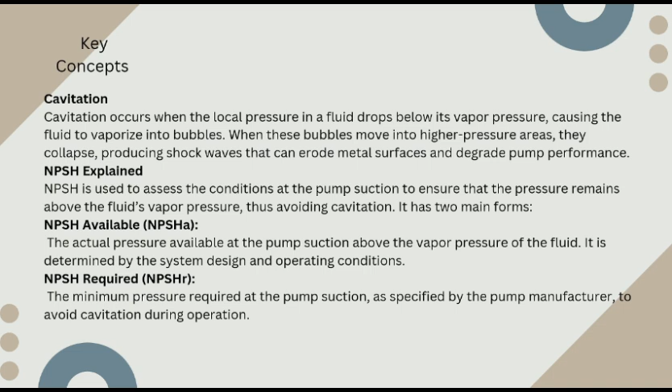NPSH is used to assess the condition at the pump suction to ensure that the pressure remains above the fluid's vapor pressure, thus avoiding cavitation. It has two main forms: NPSH Available (NPSHA), the actual pressure available at the pump suction above the vapor pressure of the fluid, which is determined by the system design and operating conditions; and NPSH Required (NPSHR), the minimum pressure required at the pump suction as specified by the pump manufacturer to avoid cavitation during operation.

So in this section, we will tackle some relevant formulas and examples for the net positive suction head available.

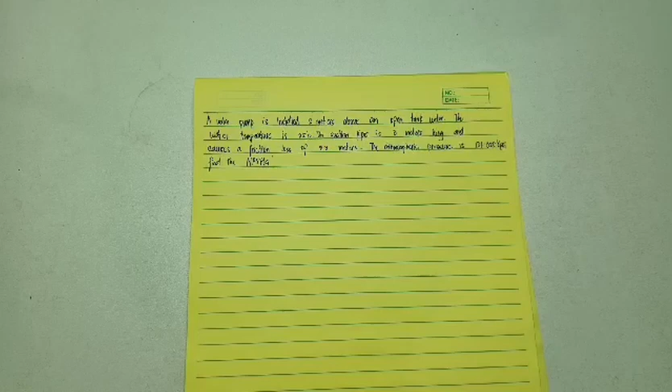The problem states that a water pump is installed 2 meters above an open tank of water. The water temperature is 25 degrees Celsius. The suction pipe is 3 meters long and causes a friction loss of 0.3 meters. The atmospheric pressure is 101.325 kilopascal. Find the NPSHA. First, we will write down our formula for NPSHA.

The formula is: PO minus PV over density times g, plus the height over gc, minus HF. So first we will find the PV.

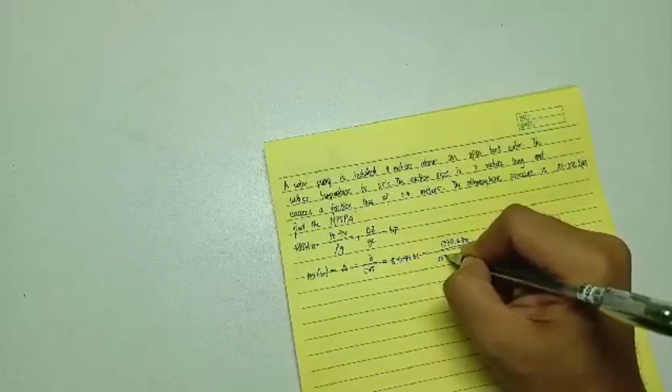The formula for PV is log of x equals A minus B over C plus the temperature, where A, B, and C are constants: 8.07131, minus 1730.630 over 233.426 plus 25 degrees.

That gives us 23.68 millimeter mercury. We need to convert this millimeter mercury into Pascal. To do so, we multiply it by 101,325 Pascal over 760 millimeter mercury, which leads us to 3157.07 Pascal.

Now we are ready to calculate the NPSHA. The NPSHA available is the atmospheric pressure, which is 101,325 Pascal, minus the PV, which is 3157.07.

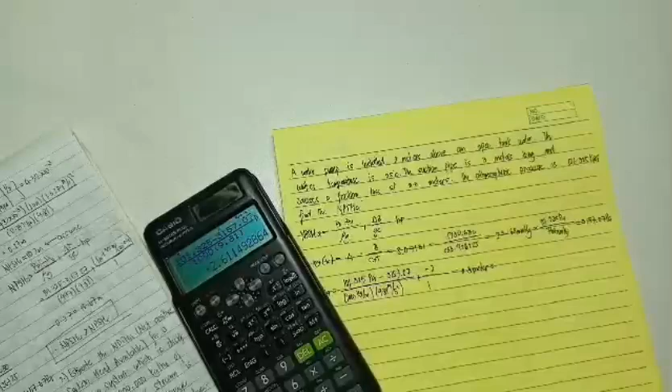Our answer here is negative 2.611 meters.

So assuming that we have an NPSHR of, let's say, 10 meters, is our net positive suction head available greater than the required? No, right? So therefore NPSHA is less than NPSHR. Therefore, cavitation will form in the pump.

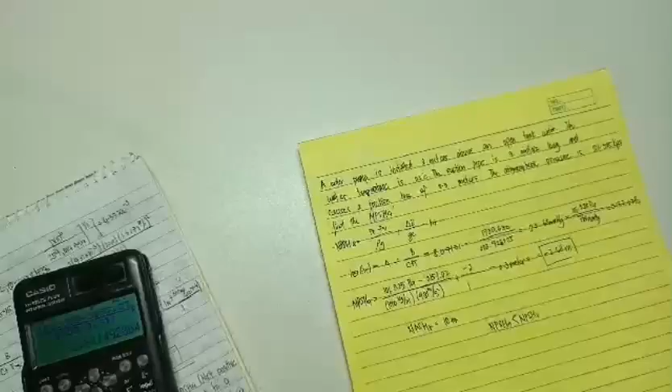So the formula for the net positive suction head available is this, just like in Bernoulli's equation, but without the efficiency and the power of the motor. First, this is PO minus PV over density times g, plus the difference in height over gc, minus HF, or the friction loss.

So why is there a g there? In net positive suction head, we are measuring the head, not the pressure. So we must find the unit to be in meters. Therefore, by putting a g there, we will get a meter unit.

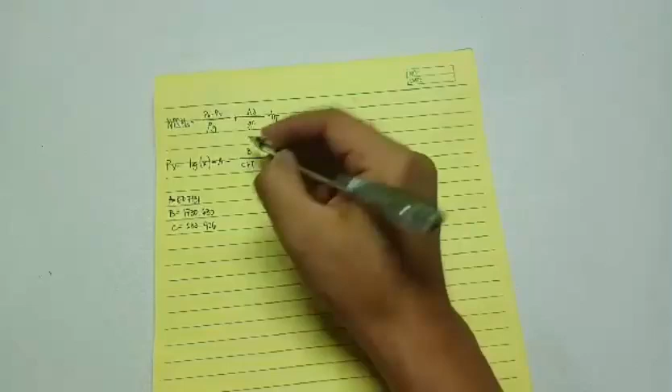So to get the value of the PV, it is simply log of x equals A minus B over C plus T, in Celsius. And A, B, and C are constants, and here are their values: A is 8.07131, B is 1730.630, and C is 233.426.

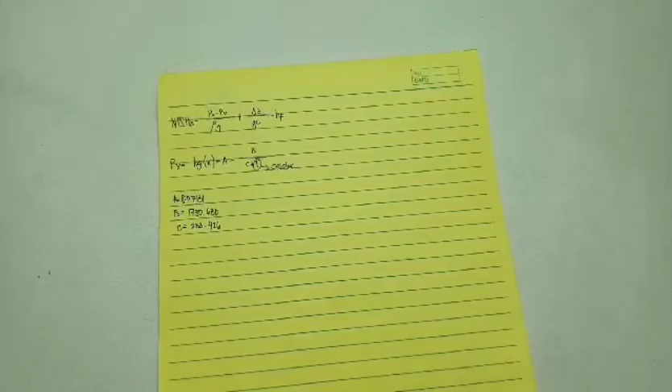So now we have an NPSH problem here. A pumping system is required to deliver 28.3 liters per second of water at 15 degrees Celsius.

The suction line has a diameter of 152 mm and is 91 meters long, made of cast iron. The suction inlet is located 6 meters above the reservoir level. The reservoir is exposed to an atmospheric pressure of 101 kilopascals. The required net positive suction head of the pump is 2 meters.

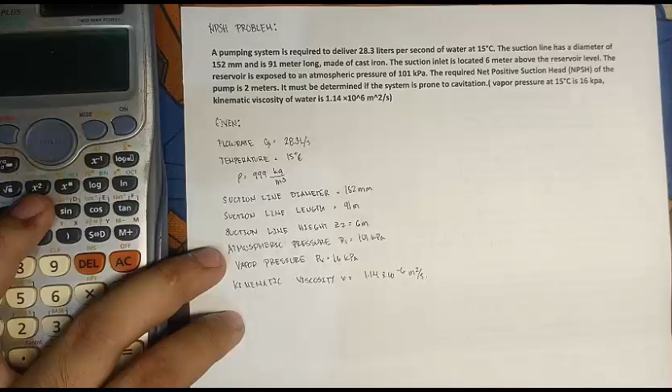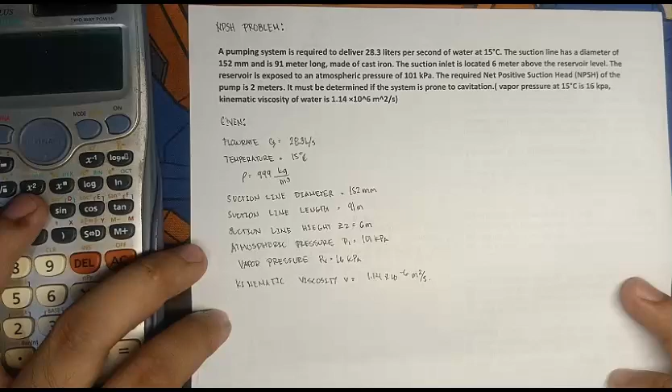It must be determined if the system is prone to cavitation. The vapor pressure at 15 degrees Celsius is 16 kilopascals.

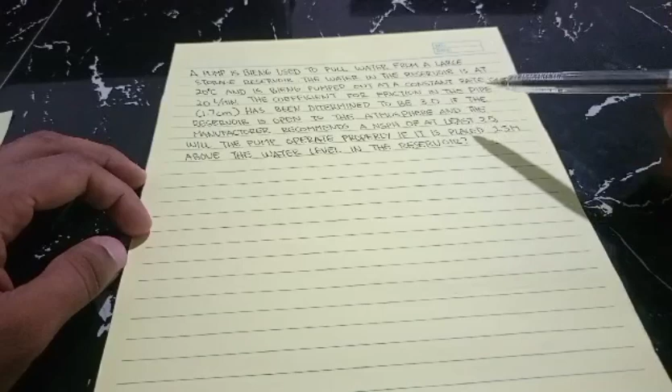The coefficient of friction in the pipe, 1.7 centimeters, has been determined to be 3.0. If the reservoir is open to the atmosphere and the manufacturer recommends an NPSH of at least 2.5, will the pump operate properly if it is placed 1.5 meters above the water level in the reservoir?

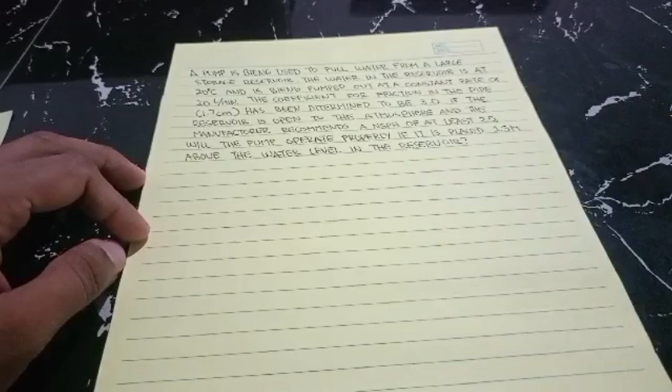So first, in order to understand the problem, you should draw it out first. So this is the reservoir, and we raise it to 1.5 meters.

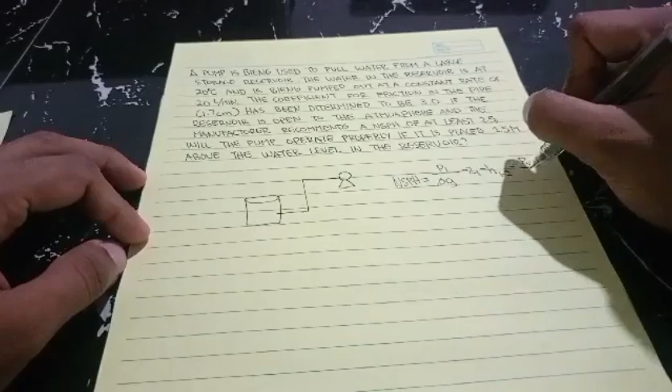Then we write the formula for NPSH, which is equal to P1 over density times gravity, minus Z1, minus H1, minus vapor pressure, divided by density times gravity.

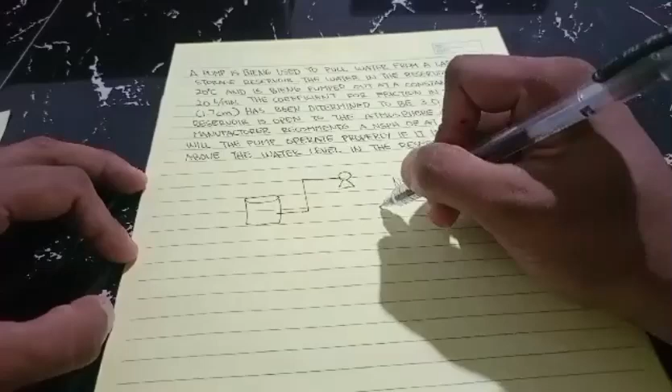So first we get H sub 1 minus 2, and the formula is CF times u squared divided by twice the gravity.

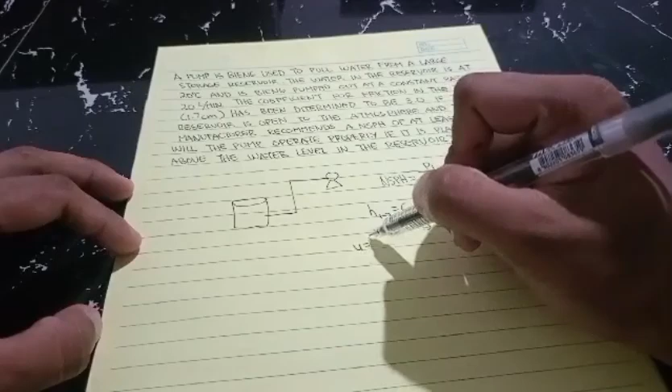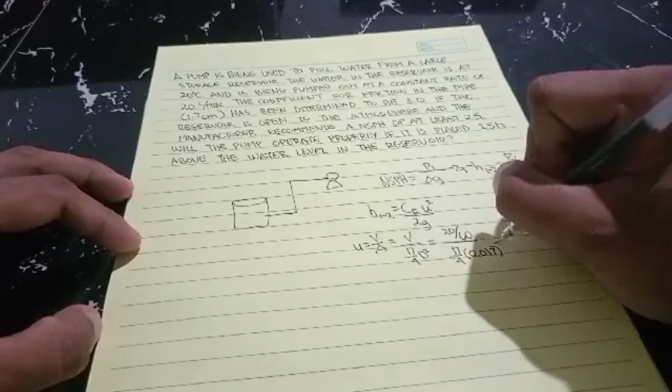So we convert u first into velocity. The formula is u is equal to v divided by pi over 4 times d squared, which is 20 liters per minute divided by pi over 4 times d, converted to meters squared, and it is equal to 1.1 meters per second.

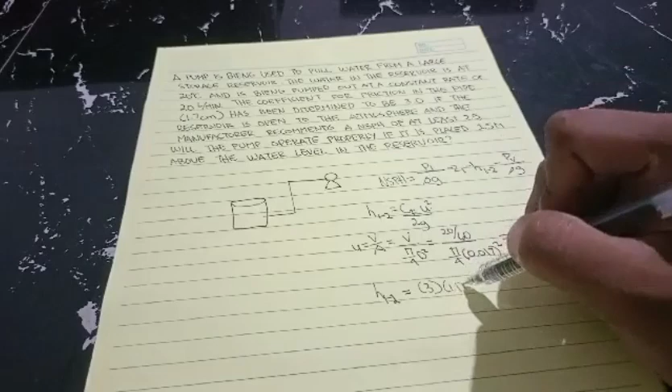Then we go back to the previous formula and substitute the given data. So 3 times 1.1 squared divided by 2 times gravity is equal to 0.185 meters. Then we go back to the formula of NPSH.

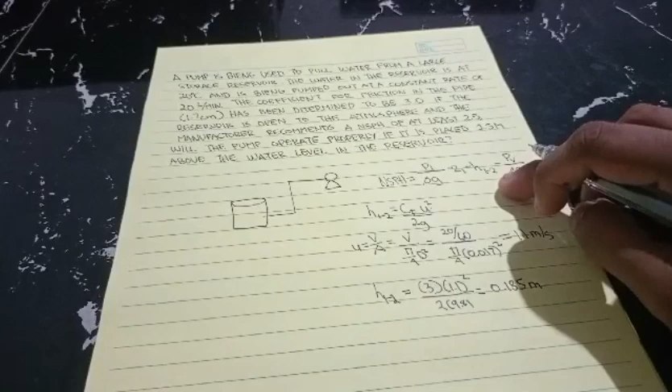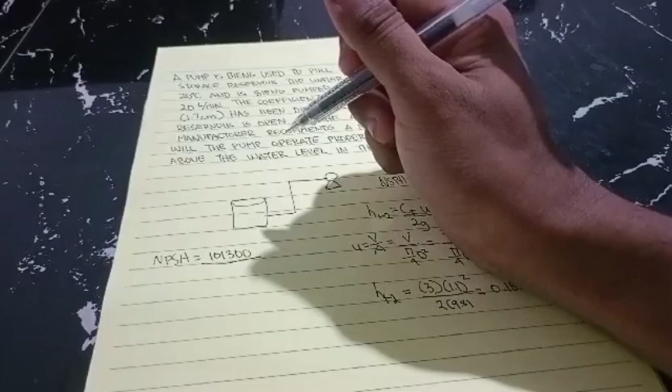And NPSH, then we substitute all the given data. The atmospheric pressure is 101,300 Pascal. The vapor pressure of water at 20 degrees Celsius is 2,985, and the density of water at 20 degrees Celsius is 995.7. So density of 995.7 times gravity minus the head.

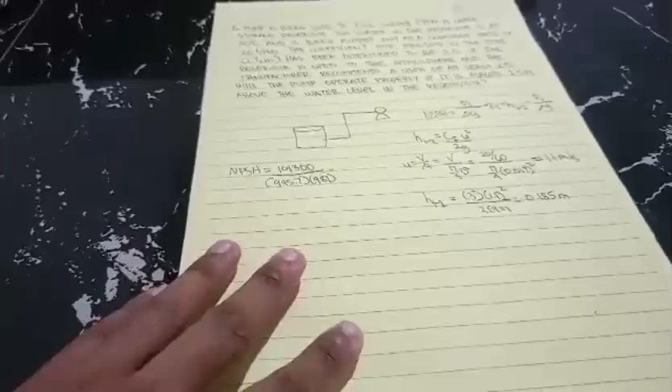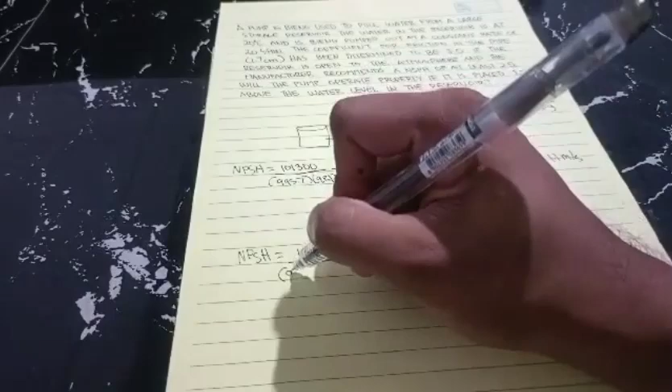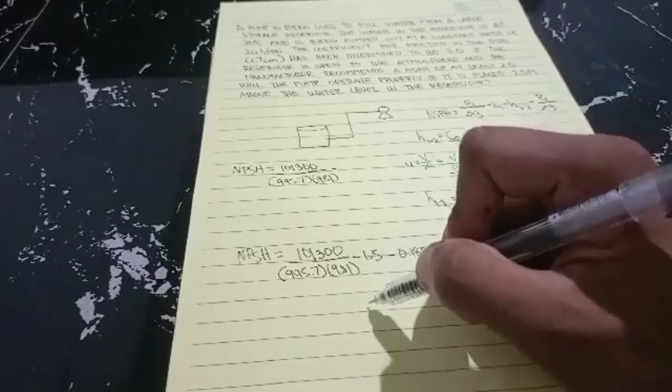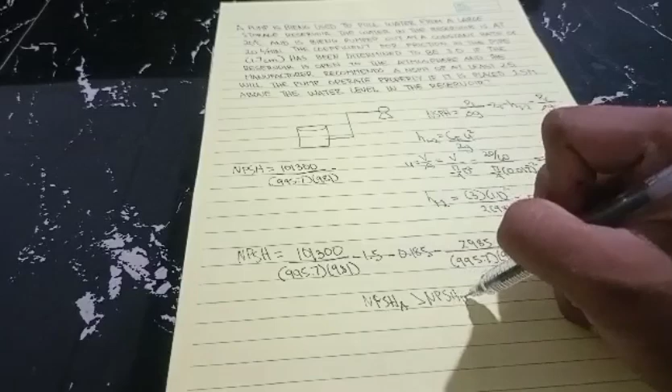NPSH is equal to the atmospheric pressure divided by the water density times gravity, minus Z1, minus the computed H sub 1-2, that is 0.185, minus the vapor pressure of water at 20 degrees which is 2,985, divided by the density of water at 20 degrees times gravity. So it is equal to 8.38 meters. Comparing the NPSH available is greater than NPSH required, so the pump will operate properly even if we place it at 1.5 meters above the water level in the reservoir.

Next problem: a horizontal shaft centrifugal pump lifts water at 65 degrees Celsius. The suction nozzle is 1 meter below the pump center line. The pressure at the suction point equals 200 kilopascal gauge. The velocity is 3 meters per second. At 65 degrees Celsius, the saturation pressure is 25 kilopascal. The specific volume of saturated liquid is 0.001020 cubic meter per kilogram. Calculate the net positive suction head.

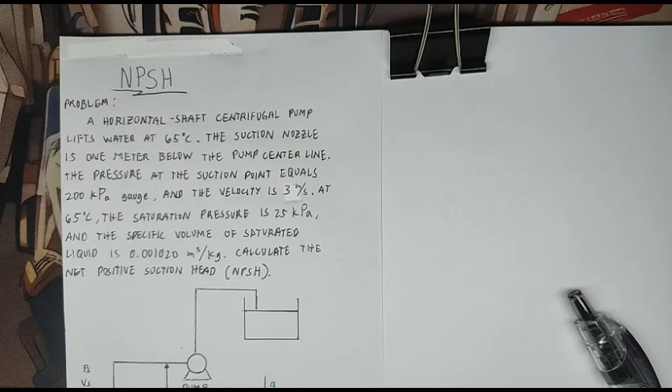So the given is: PS, the pressure at suction point, is 200 kilopascal. The velocity at suction, Vs, equals 3 meters per second. The suction nozzle below the pump center line, ZA, equals Z1 minus ZS, equals 1 meter. The saturation pressure at 65 degrees Celsius, PSAT, equals 25 kilopascal. The specific volume of liquid at 65 degrees Celsius, V, equals...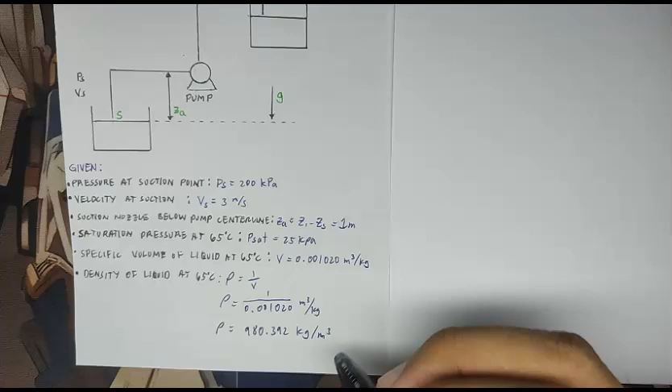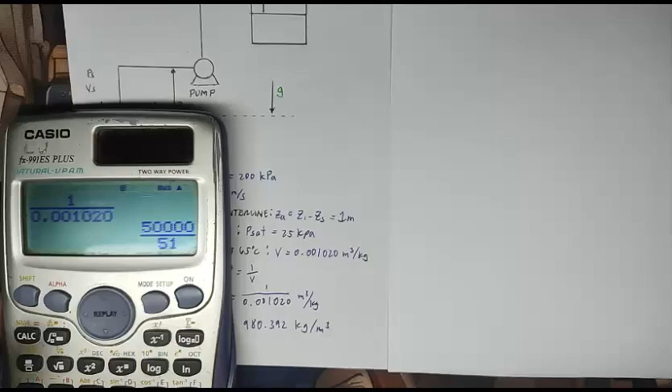1 over 0.001020. So they are the same.

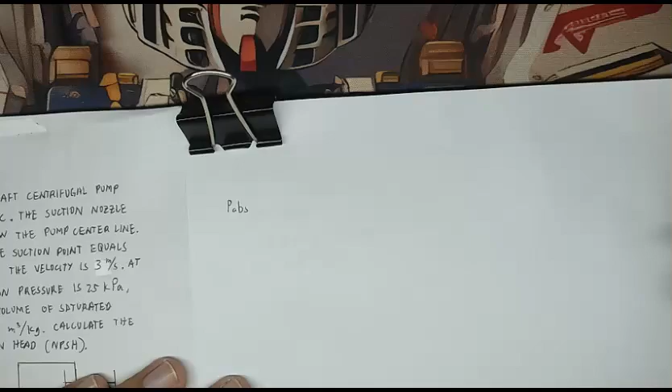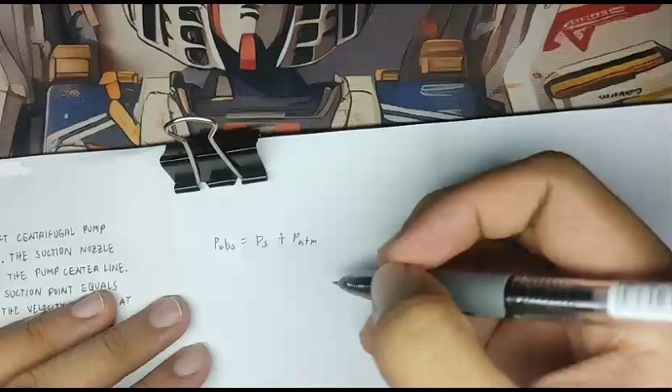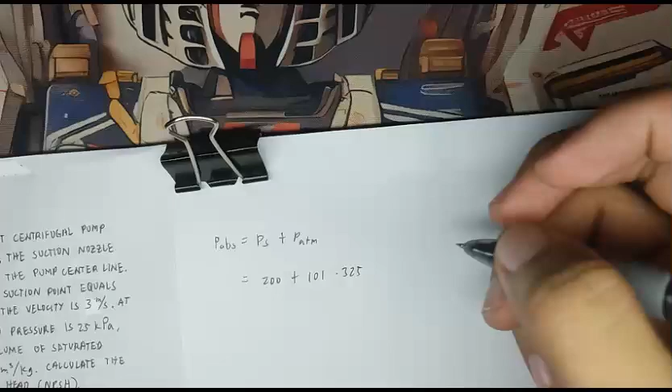P absolute is equal to PS plus PATM. Given, PS is 200 kilopascal. PATM, at 1 ATM, we have 101.325 kilopascal. Substituting into the formula: PS is 200 plus 101.325 kilopascal. So our P absolute is equal to 301.325 kilopascal.

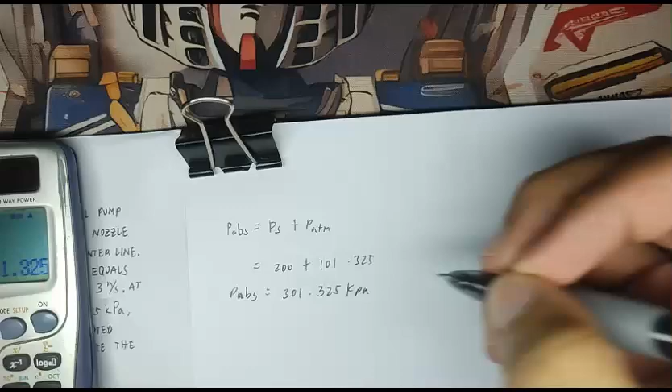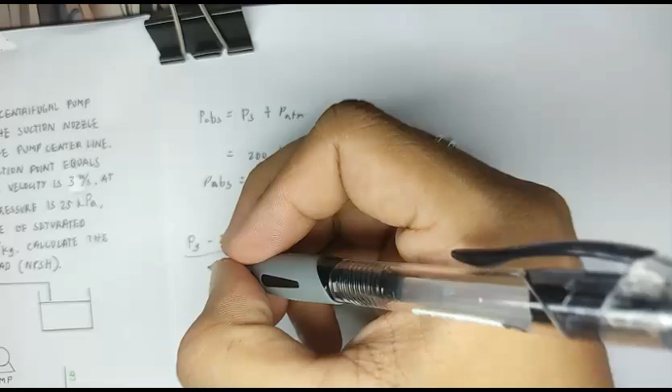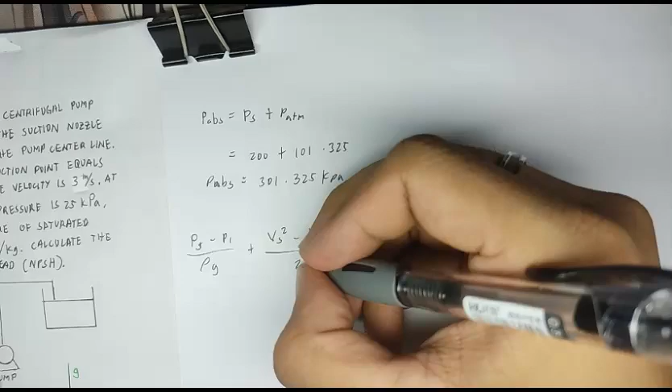Recall the Bernoulli equation. Its formula is P1... PS minus P1 over density times G, plus Vs squared minus V1 squared over 2G, minus ZA. So our net positive suction head formula is...

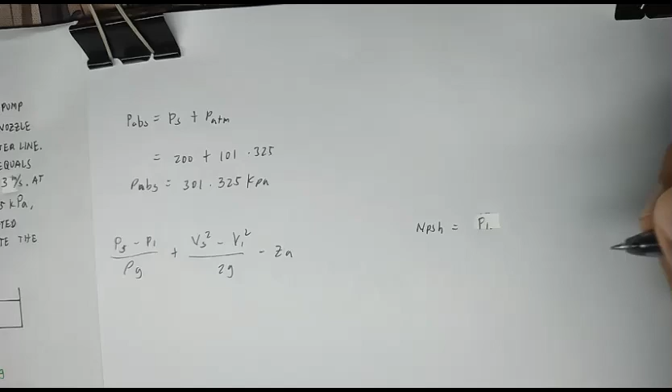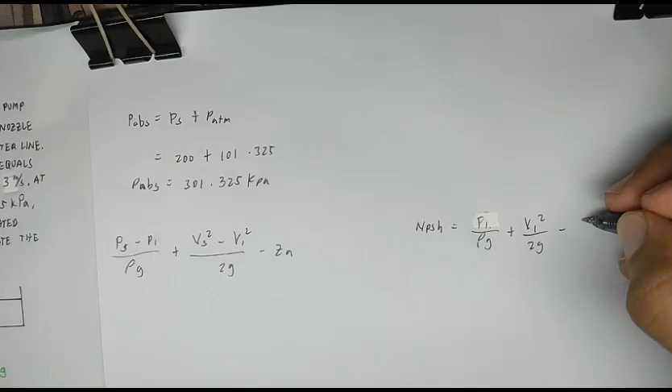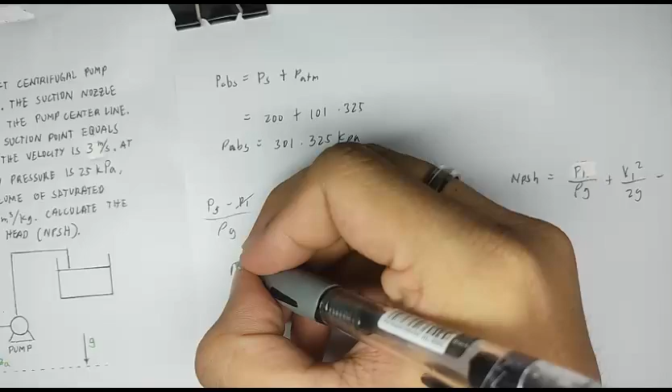NPSH is P1 over density G plus V1 squared over 2G minus P saturation over density G. But we don't have given P1 and V1 squared. So our formula becomes PS over density G plus Vs squared over 2G minus ZA, since this formula has no P1 and V1.

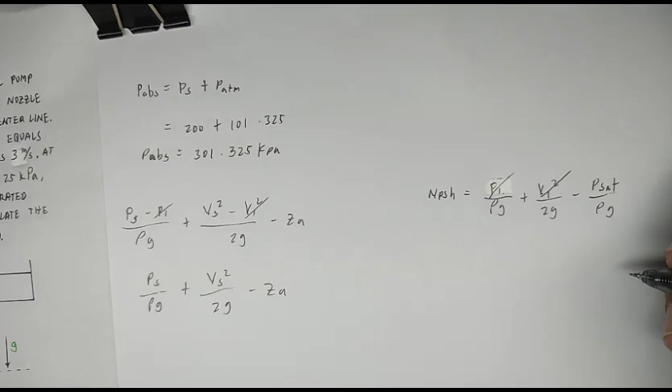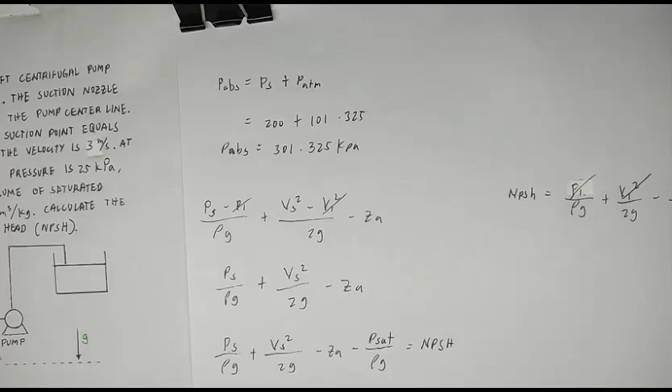So we can substitute PS and Vs squared into our NPSH formula: PS over density G plus Vs squared over 2G minus ZA minus P saturation over density G equals NPSH. We can combine PS and PSAT: PS minus P saturation over density G plus Vs squared over 2G minus ZA equals NPSH. This is our working formula.

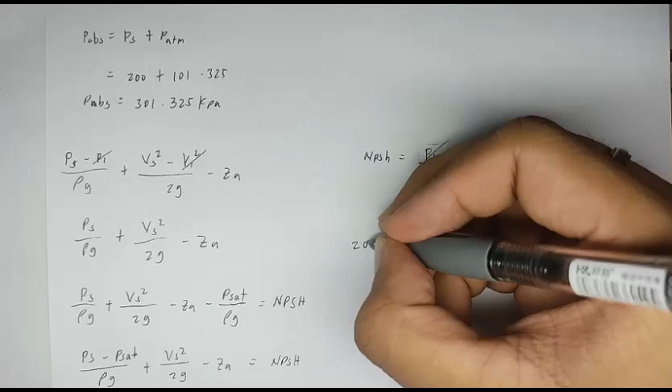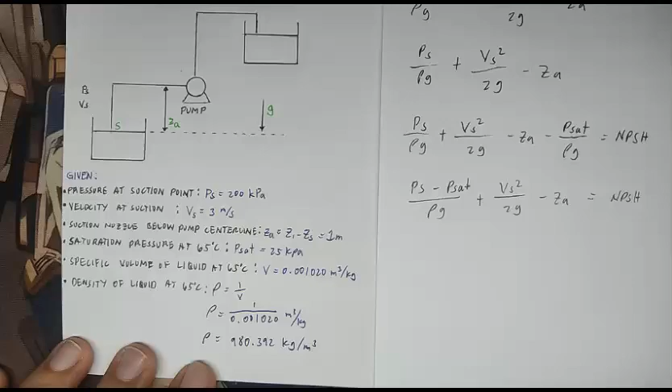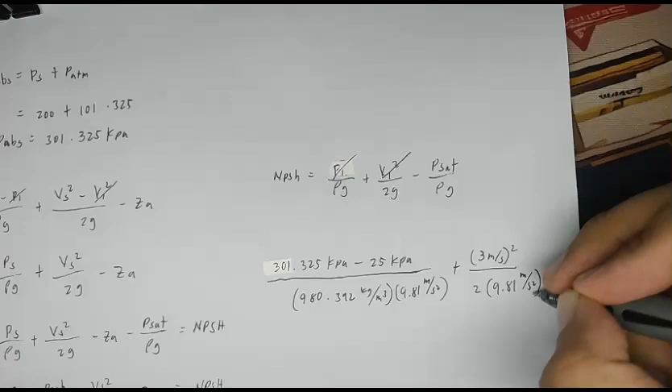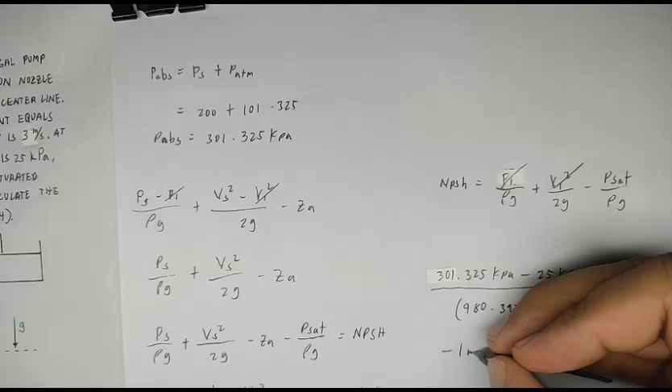Our P absolute is 301.325 kPa, minus P saturation, which is 25 kPa, over density. Our density is 980.392 kg per cubic meter, times gravity 9.81 meters per second squared, plus Vs squared. Our Vs is 3 meters per second, so 3 meters per second squared, over 2G, 2 times gravity 9.81 meters per second squared, minus ZA. Our ZA is 1 meter.

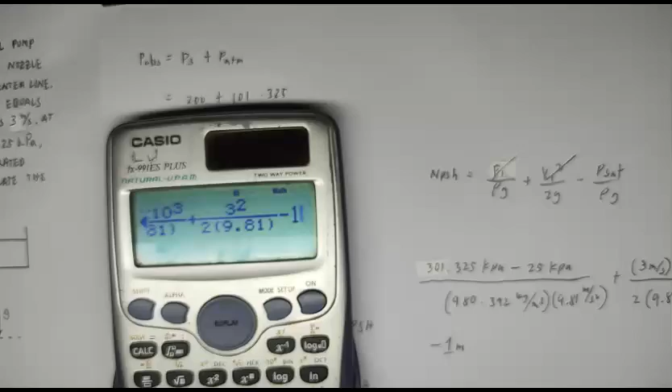301.325 minus 25 times 10 to the power of 3, over 980.392 times gravity 9.81, plus 3 squared over 2 times gravity 9.81, minus 1 which is our ZA. Our answer is 28.19 meters.